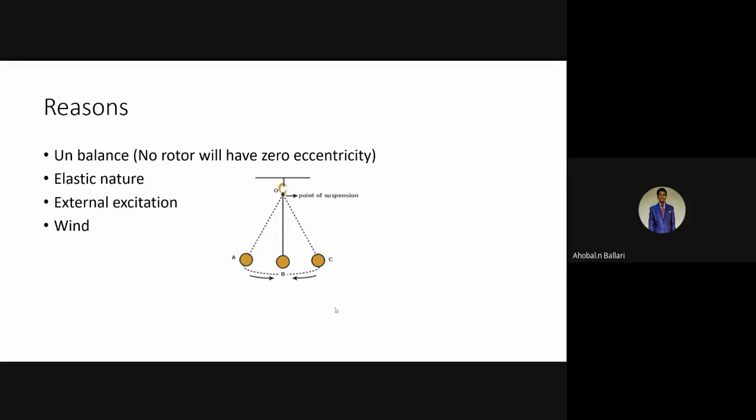Here the answer is: when the mass is distributed only at the end, it is called a simple pendulum. When the mass is distributed throughout the system, then it is a compound pendulum. If a beam is attached instead of the ball, it can be called a compound pendulum because the mass is distributed. Here, when compared to the ball, the thread mass is neglected, so the mass is concentrated only at the end - that is a simple pendulum, as opposed to a compound pendulum.

Compound pendulum will have - a system will have - how many natural frequencies? Infinite number of natural frequencies, being a continuous system. So for any rotating system or any system, before we start vibration analysis, we have to check the natural frequencies. The natural frequency, in the sense, is simply the frequency of free vibration that we have to identify. And one important thing we have to consider is how many natural frequencies we are going to consider for our analysis - whether we are going to consider only one, or two, or third, fourth, or fifth.

That mainly depends on what criteria. So what is the criteria that decides how many natural frequencies we are going to take for our analysis? Can anyone say? Based on what can we select the natural frequencies that we have to consider for our analysis? Can anyone say? Because even when we might have done some experimentation, even in a dynamics laboratory, we may teach our students this particular experiment.

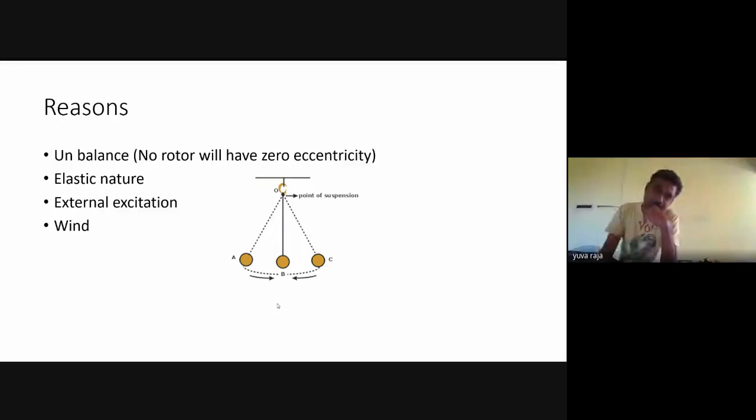Even the simple pendulum figure is in front of you. When we teach this particular simple pendulum experiment to students, they may be calculating the time period or natural frequency of the system. So there is a relation, and this relation can be verified with experimentation. One student may give an initial disturbance, and other students may give a different initial disturbance - it may differ from one to one, but the natural frequency will be the same.

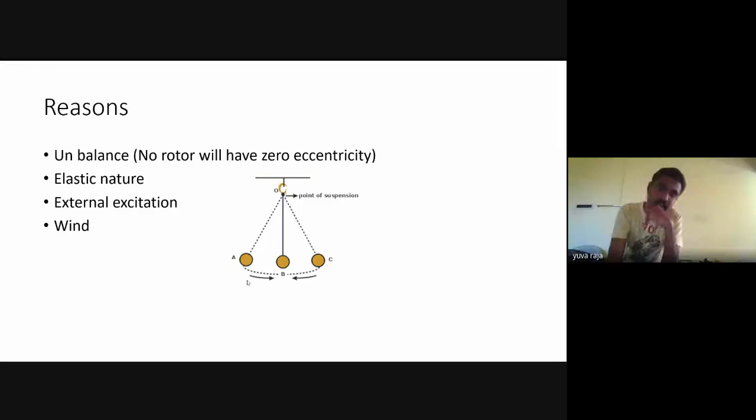So we have to ask how the natural frequency remains the same though you are giving a different initial disturbance. One may give a very long initial disturbance, one may give a very short initial disturbance - so the velocity will compensate. Similarly, for all cases we have to analyze. Here, in most cases, vibration produces bad effects. In some cases, vibration is required - it produces a good effect.

So vibration may produce unwanted stress, rapid wear and tear in bearings and gears. So we are going to talk today a little bit about rotating machinery. So bearings and gears and loosening of parts, etc. These are all some bad effects produced by vibration.

As we all know, some good effects are in testing equipment where we are using vibration. Vibration also produces good effects in conveyors, feeders, hoppers, sieves, etc., and musical instruments. So here, not only a rotating device. First of all, we are experiencing vibration in many places. Even when we travel, we are experiencing some unwanted vibration. That unwanted vibration transferred to the passenger is removed by means of various methods.

Even a rotating machinery, any other machinery, vibration produces some unwanted effect. So as an engineer, as a faculty, as a student, one should know where we have to go for what kind of controlling mechanism. Simply we may not be able to apply a damper to all cases. Simply we may not be able to apply a vibration absorber to all places. An isolator. Some passive methods, some active methods.

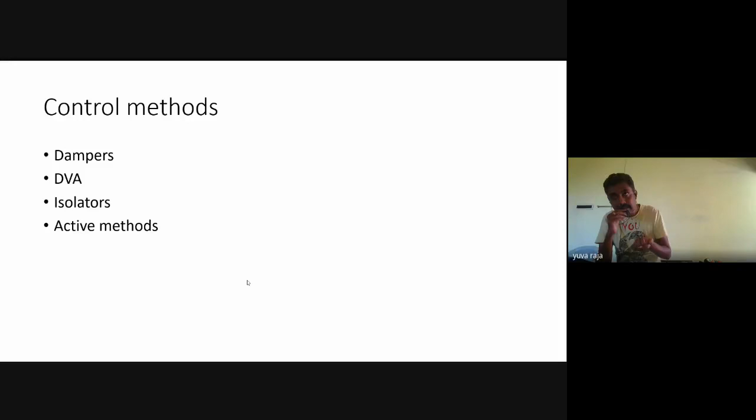So if such a case occurs, then what? The system may vibrate vigorously. The system may fail, may encounter some unwanted stresses, or even some catastrophic failure.

So any system we take, once we find out its natural frequency, immediately we look at the operating frequency range. Though the amplitude of vibration is higher in case of resonance, regular operation is a kind of fatigue load. Vibration is always fatigue in nature, because a system is continuously operating at nearly 1000 rpm or 2000 rpm. For every cycle, there will be a vibration. Even if the unbalance is very small, at 20,000 revolutions per minute

the effect, because of that small mass, small unbalance, is very high. So we are trying to reduce and minimize the amplitude of vibration as much as possible. Reducing the amplitude of vibration will definitely improve the lifespan of the system.

So here, though we are finding out some natural frequency and the operating range, we have to see where we have to go for what kind of a control mechanism. Simply, we may not be able to go for any method. We have some passive methods, we have some active methods.

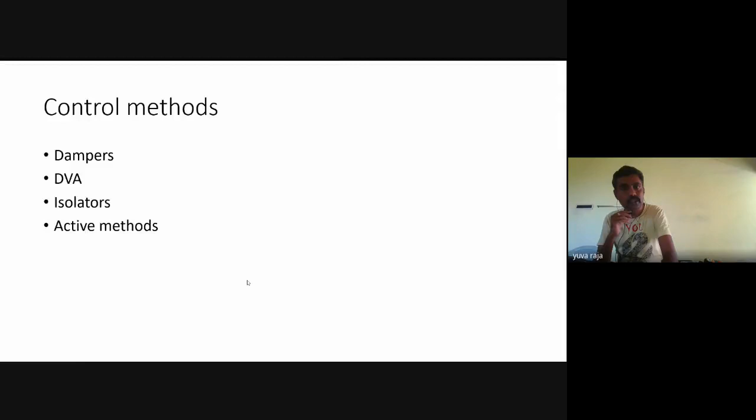Then we have to see what kind of method we can deploy in order to counteract the amplitude of vibration in that particular application, whether it is a machine tool, a bridge, or any application. Here I am going to touch upon the one. We have a damper. A damper is one extensively used method to control the vibration in any system, whether it is a rotating or reciprocating system.

A vibration should be counteracted by a damper, because a damper is a device which dissipates the energy by means of friction or by some other mode to reduce the energy. Because suppose you want to bring down the vibration, means what? You have to drain the energy from the system. The energy from the system should be drained.

Say for example, when we are going to office in the morning, we are brisk. In the evening, we are not that much brisk, because our energy is drained. Similarly, the system energy should be drained, should be dissipated to bring down your system to rest or equilibrium or calm. Here there are different damping, you all know: critical, over damped and under damped.

Here I am raising one question. Most of the mechanical systems are employing under damping. Under damping is used in almost 100% of systems, except one or two places where it is really required, a critical damped system may be used in practical application. Unless otherwise, the most used damping for your case is under damping. Why? Anyone can unmute and answer why under damping is mostly used.

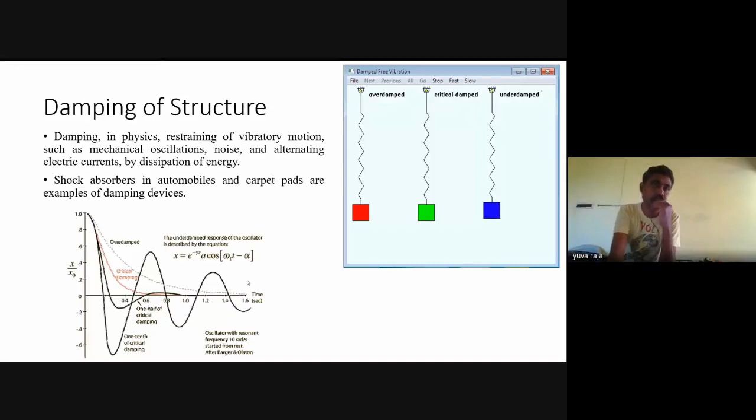So whether you decide to go for a damper to control a vibration after analyzing its natural frequency, or after analyzing the response of a system, you are trying to minimize the response of the system to the maximum extent possible. Then the moment you decide a damper is a suitable mechanism, you decide which damping method. So mostly it is under damping. Some cases where it is purposefully required is a critically damped system. In very minimum cases we have to justify why we are going for such a type of damping. That we have to clearly justify the response.

Here mostly the analysis is a forced vibration, because we are driving a car, with so many rotating parts inside the vehicle. A gearbox is there, engine is there, and many rotating parts are there. The system will experience vibration because of its rotating parts, and the neighboring components also will experience vibration because of its rotating parts.

So forced vibration is mostly a machine tool. A spindle is operating at high speed in a machine tool, at up to 25,000 or 30,000 RPM. So that leads to vibration in the nearby components; a machine bed or nearby components may experience vibration. Even an operator, or even a nearby machine, will experience vibration. It is forced in nature. When you are standing on the bridge, or a vehicle is going on the bridge or under the bridge, you can experience vibration.

When you are standing nearby a bridge, nearby a building that is near the bridge, and a train passes over it, you can experience vibration. It is mostly a forced vibration.

There are two components in case of forced vibration when you analyze it. One is transient, and the other is steady-state. The transient is what will vanish with respect to time. The other part will exist as long as the continuous excitation is present in the system. So forced vibration is simply a vibration where, with application of a continuous excitation, the system will undergo vibration.

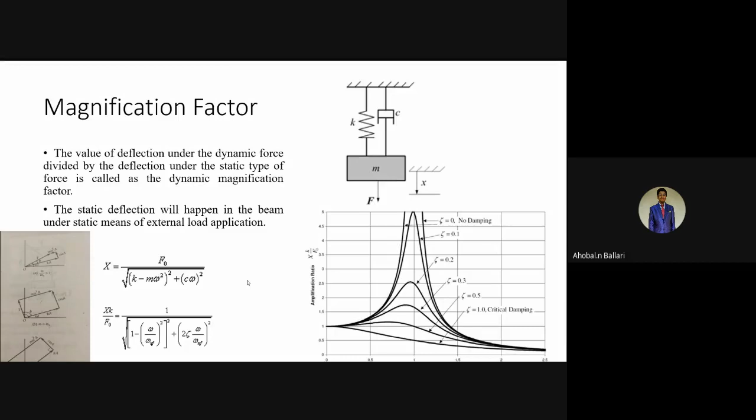Because of forced vibration, this graph is very much essential. Magnification factor, as you can see, is x by (f naught by k), or x by xst, that is the amplitude of forced vibration to that of static deflection. So when we consider the amplitude of forced vibration compared to that of static deflection, we can compare the two, where the forced vibration amplitude will be more than that of static deflection. The answer is it is magnified.

Suppose you look at it for all values of damping, it starts at 1. When omega by omega n is 0, it starts at 1, because the ratio of static deflection and amplitude is the same. But the moment you start applying force, that means RPM, when you start rotating the system and operating at a frequency, then it will magnify. That's why the graph attains some peak, some higher values. So the moment it starts, it magnifies, and that's why it is called a magnification factor.

The amplitude ratio will be higher when you keep on applying force. That's why it is called a magnification ratio. It will be magnified as you keep applying force, or as the RPM increases, it will also be magnifying. When there is an unbalance or bend, it depends on the system. A rotating system will experience different kinds of defects, and each one will contribute.

So here, if you look at this vector graph, I'll take 1 or 2 minutes on this. In forced vibration, we have 4 forces.

When you look at the first graph, Ka is the amplitude, it is the spring force. For the maximum value, x is equal to x sin omega t. We are assuming a harmonic force, differentiating with respect to time to get velocity and acceleration. Here Ka, for the maximum value, is given as Ka. It is a spring force.

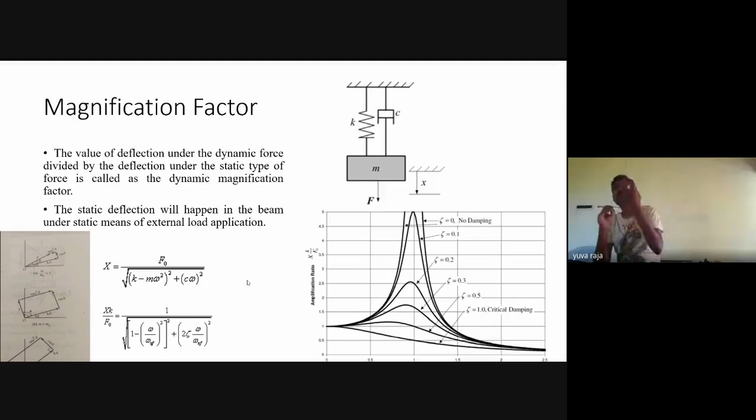We have to choose the mechanism of control also based on some kind of analysis, like we have to analyze the aspects. We have to analyze the frequency response. With respect to frequency response, we have to analyze whether we are operating our system in a stiffness dominant domain, or we are operating in a mass dominant domain, or really a damper is significant for our application. Then only we have to go for a damper.

Forced vibration is what we are concerned with, whether any kind of system is reciprocating or rotating, because a system is mostly experiencing forced vibration. The analysis is because of forced vibration only, the response exists. As long as the force is there, the response is there. So we are trying to reduce a forced vibration.

It is going to diminish. The vibration is going to come down. The vibration is going to settle down. So the settling time may be different. The response is also that much affected.

It is not going to affect unless the force is applied, unless the external excitation is applied on the system, unless it experiences resonance or is operated near to that. The system will not undergo any difficulty. So that is where we have to go for it.

It depends mainly on omega n equals root of k by m, whether we are targeting a stiffness or whether we are targeting a mass. Even if both are not possible, if the system anyway somehow experiences resonance, operating near to that speed, it is an unavoidable situation, then go for a damper, then select a suitable damping factor value. It depends on your case, and try to dissipate energy. Then you bring down your system to minimum vibration.

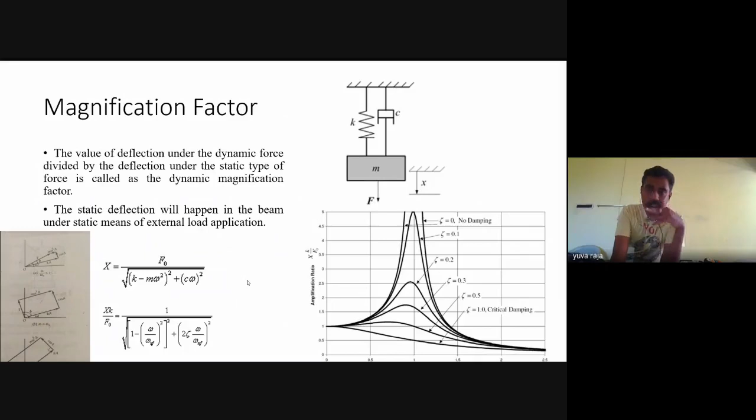Here, the force is applied from outside. The other one is the force is inbuilt, in the sense maybe an unbalance, it is like inbuilt because the force setup is because of unbalance present in the system. Now I am asking you one difference between the magnification factor graph, and the graph of frequency ratio with the amplitude ratio because of this unbalance. What is the difference between these two graphs?

Here it is because of what? Centrifugal force, because of some mass and eccentricity will contribute to vibration. So when the system is rotating, when there is an unbalance, that will lead to unnecessary vibration. That will cause an eccentricity in the system, leading to unnecessary vibration. That unnecessary vibration will harm the bearing or any other nearby neighboring system.

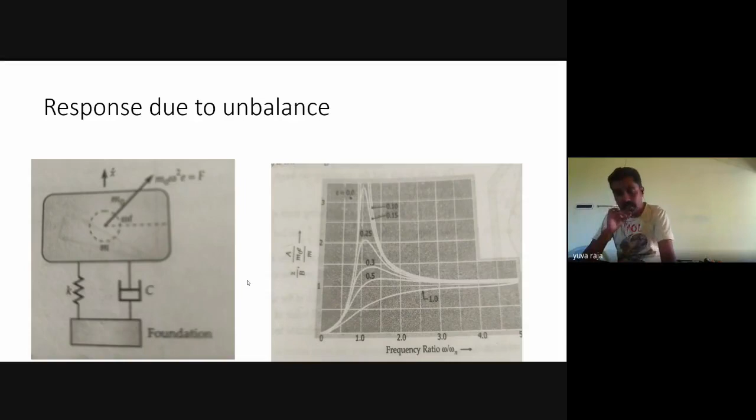Then we discussed the critical speed. It is a rotating system here, which we are teaching, and we discussed many points related to this experiment in the previous slides. One point I want to tell you: any system will have n number of natural frequencies, and n number of critical speeds. The critical speed is the speed at which, why is it called critical? Because we are not supposed to operate at that particular speed, because if you operate at that speed, the system will experience a failure. So in the experiment, suppose the motor RPM is 1440 or something around, say for example you can take 3000 RPM. You have a shaft, and you can calculate the natural frequency.

Here, what criteria do we have to analyze again? If you take a shaft, can anyone answer? You might have taught this critical speed of shaft to students. Can anyone tell what criteria, what boundary conditions we have to consider while talking about the critical speed of a shaft? Can anyone unmute and tell? Because a system will have a number of...

We have to consider the bearings as a rigid support and the shaft as a soft material. Then we can apply the boundary conditions there.

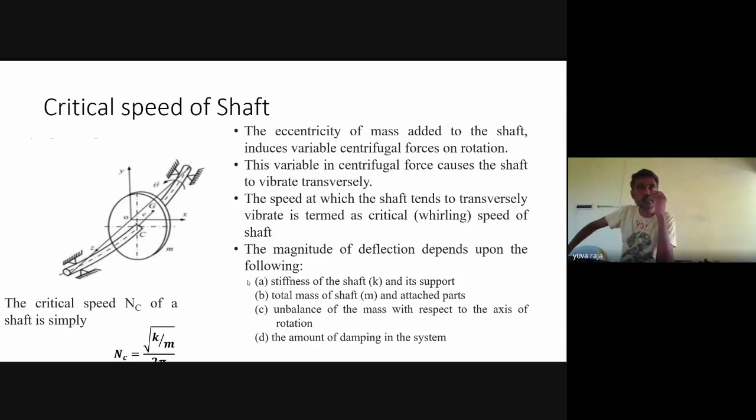The critical speed—sometimes we ask students and they may not be able to tell what critical speed is. Critical speed is nothing but simply the natural frequency. That is what we are finding out—we find the natural frequency and we compare it with the operating speed. Clear? Here the condition may be a shaft.

Here's one question: suppose your system is completely, perfectly, theoretically balanced—shall we operate at the critical speed? Yes, definitely you can operate your system at a critical speed, but the possibility of that is almost zero. That's why we are not trying to attempt the same.

Apart from that, your shaft may have a small bend or anything, so that even before that critical speed, your system may experience some unwanted amplitude of vibration, or may fail because of the bent shaft. So here the case is only about critical speed.

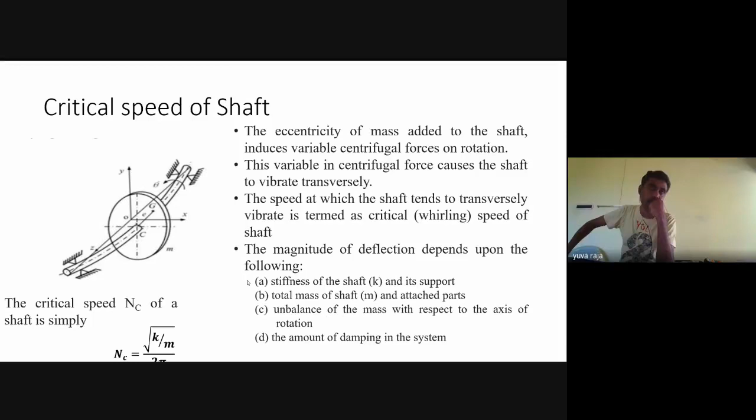When we are talking about a pump and motor system, alignment also comes into the picture. Alignment, or misalignment, is a very important point that we have to consider in fault diagnosis or condition monitoring—misalignment. Clear? Here, as we discussed,

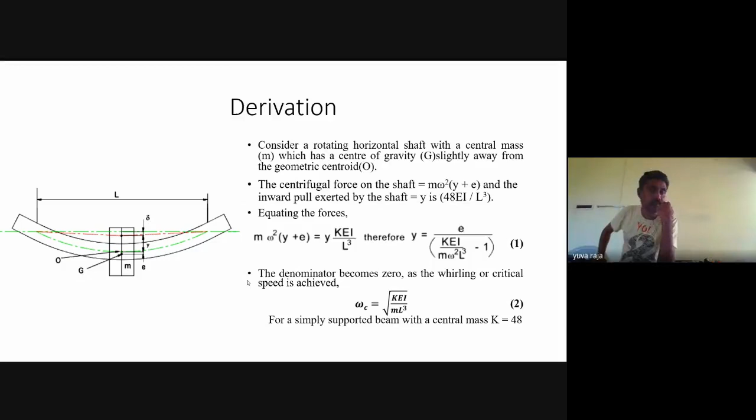based on this, your shaft weight and your center of gravity—where it is going to act. Your CG is acting either outside the axis or inside the axis. It depends on whether you are operating in a certain response range.

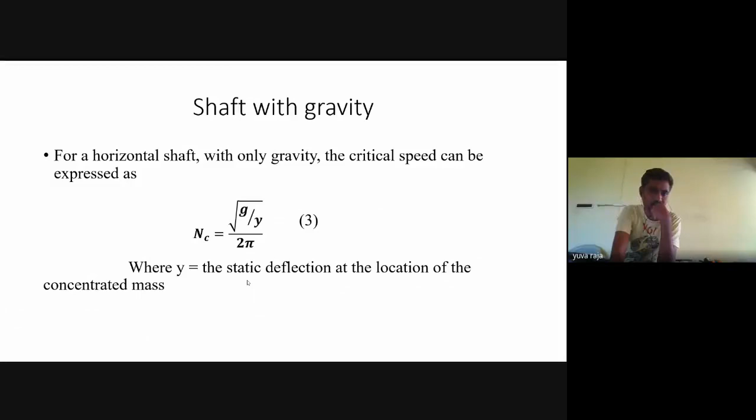If you look at this particular shaft with gravity only, with negligible mass, the relation will be this one. If omega by omega n is less, the deflection y and e have the same sign—that is, the center of gravity lies outside the geometric centroid of the shaft. When the operating speed is higher, it acts inside. When it is even higher, that will tend to coincide with the static deflection. That is why for higher speeds, you will experience lesser vibration.

The vibration—even very smooth running operation—you may experience less vibration for higher speeds.

When omega by omega n is equal to 1, what happens? If you look at this relation, the response of the system will be infinite when you substitute omega equal to omega n, both are the same. The deflection y will be infinite. Because of that, the system will experience unwanted huge vibration, an unwanted huge response. So critical speed analysis is also one important factor for any vibration.

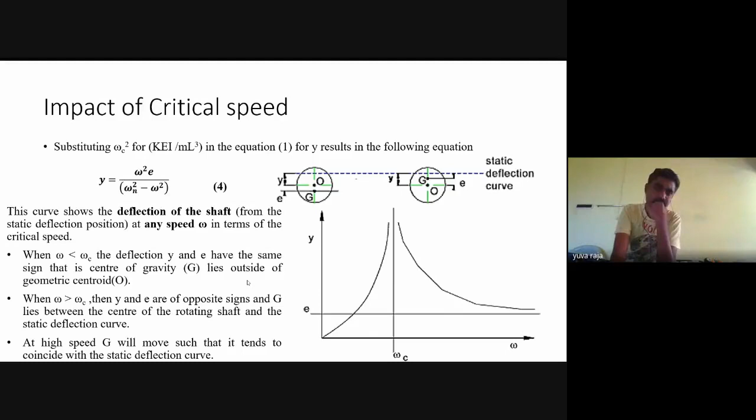So as we discussed, different boundary conditions: a cantilever with a rotating mass at the end, a central rotating mass with a long bearing. How do you define a long bearing and a short bearing? What is the difference? Can anyone unmute and tell? So based on the L by D ratio. Yes, when the L by D ratio is greater than 1, it is a long bearing, and when it is less than 1, it is a short bearing. Very good.

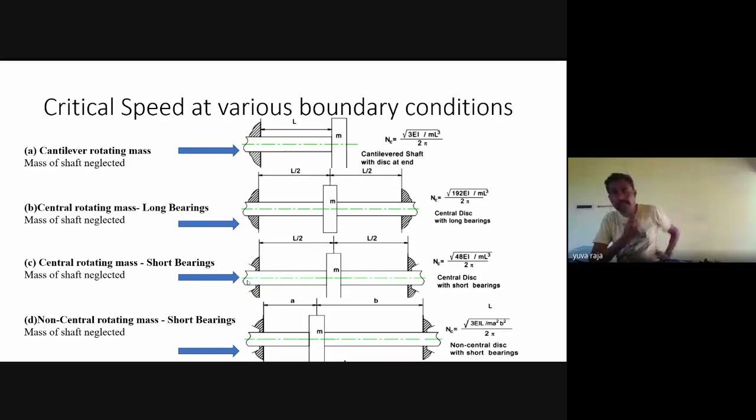Then some different end conditions. We have the response, we have the critical speed. How to find out the critical speed is given. Again, it is a function of this. So even when we are talking about active vibration methods, suppose you want to alter the natural frequency, definitely we have to look at the Young's modulus, the cross section, stiffness and mass. So those are the parameters of the equation.

Then these are all the different conditions with different end supports and different loading conditions. When it becomes multiple degrees of freedom, the relation is here. The Dunkerley method or Rayleigh method is specifically used for transverse vibration. Both are approximation methods. One will give a slightly lower natural frequency, and one will give a higher natural frequency for combined loading. So various boundary conditions are given.

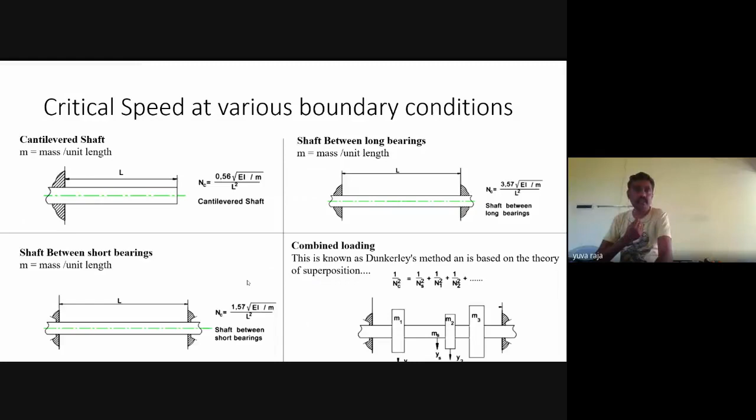And we talked about damper and critical speed, and now transmissibility and vibration isolation. My question is where we have to go for vibration isolation. The damper is suitable when omega by omega n is around 0.8 to 1.2, operating in that particular region. It will be more effective. Another method is a dynamic vibration absorber, for constant speed machine application, because we add a secondary system to the primary system and try to absorb the energy of the primary system through the secondary system. The secondary system will vibrate and the primary system vibration will come to zero. Theoretically speaking, but practically it will not come to zero.

And we cannot claim that all machines are constant speed, because even a slight voltage fluctuation may cause a slight deviation in the speed, which changes the performance of the dynamic vibration absorber or secondary system. That leads to what? Maybe an increase in amplitude of vibration. Theoretically, it is mostly suited for constant speed machines. When omega is equal to omega n and you design a secondary system whose natural frequency matches your operating frequency, your primary system will come to rest.

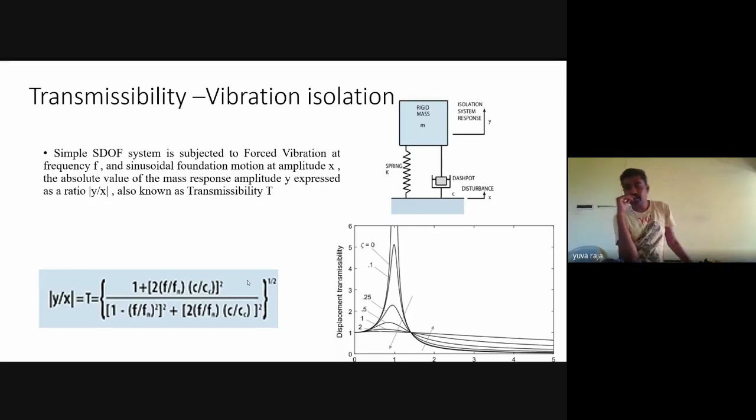So here, the automatic monitoring concept. Now, maybe we have the facility for all. We have a DST sponsored noise and vibration laboratory in PSG College of Technology. We have reasonably good facilities for vibration analysis. For any system, we have single axis and multiple axis transducers available with us, and we have PXI modules, a data collector, a modal shaker. We have all the systems with us.

Then we have FFT. When you take the time domain graph into the frequency domain by using a fast Fourier transform, we'll be able to convert it to the frequency domain. A simple example: a simple rotation is converted into a time waveform graph. Here one complete cycle is 360 degrees, one revolution. A simple conversion of

simple harmonic motion representation. Here, if you take a pump vibration, there is an impeller rotating inside the pump. The impeller may have 4, 5 or 6 vanes. Depending on the number of vanes, tiny packets of water are forced into the pipe. That effect is called the water hammering effect or hydraulic pulsation. That is one important factor while analyzing pump vibration.

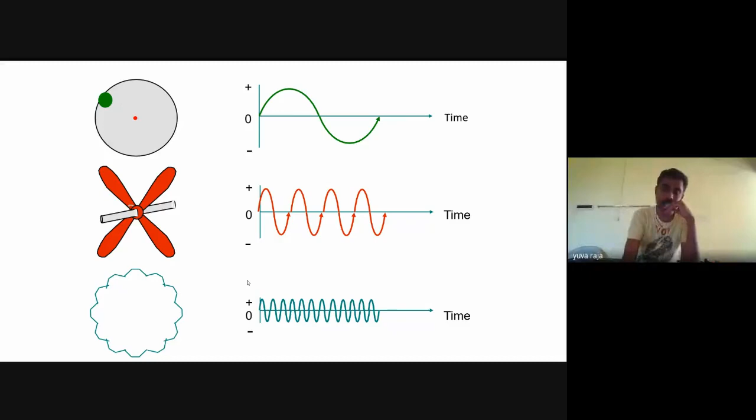So a graph is given here in front of you for each case. Then a complex graph is given here, in the time domain. So it is superimposing one on the other. One complete revolution, whereas the impeller system will experience 4 cycles per revolution. The other one is 12 cycles per revolution. So it is mixed together.

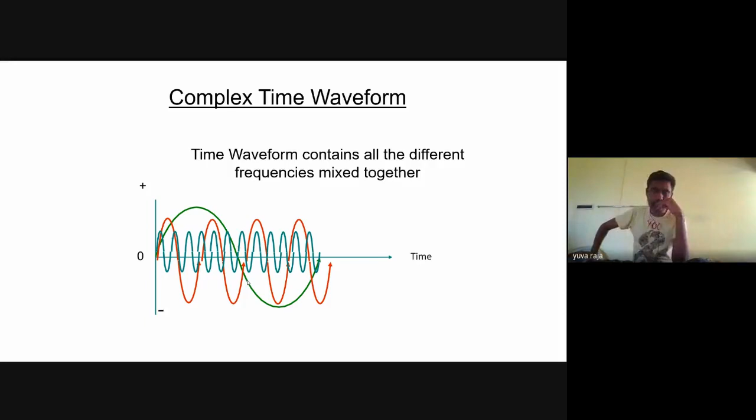But with the time domain analysis, we may not be able to infer any fruitful results. Because of that, we definitely have to go for a frequency domain analysis. So for that, we have to convert the time domain analysis into frequency domain analysis by using an FFT analyzer. Fast Fourier transformation we may use to convert this into that one.

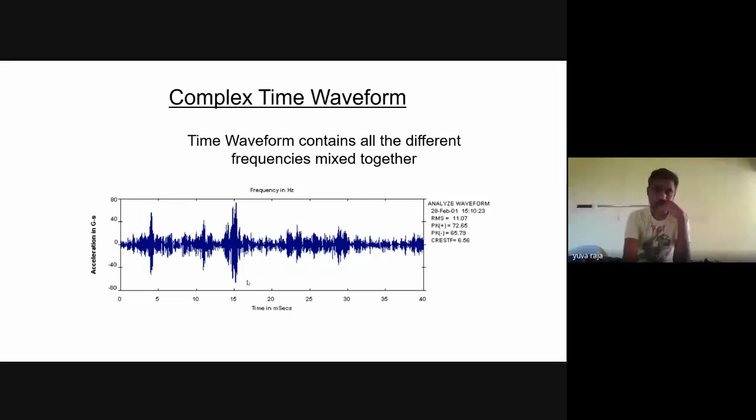Here it is given with respect to acceleration, or you can give it with respect to displacement, or with respect to velocity, whatever it is. The measurement may be with respect to any quantity. With respect to any quantity. Now in a frequency...

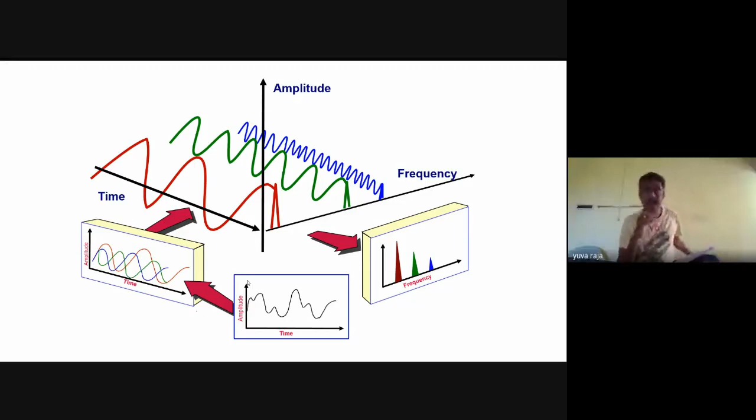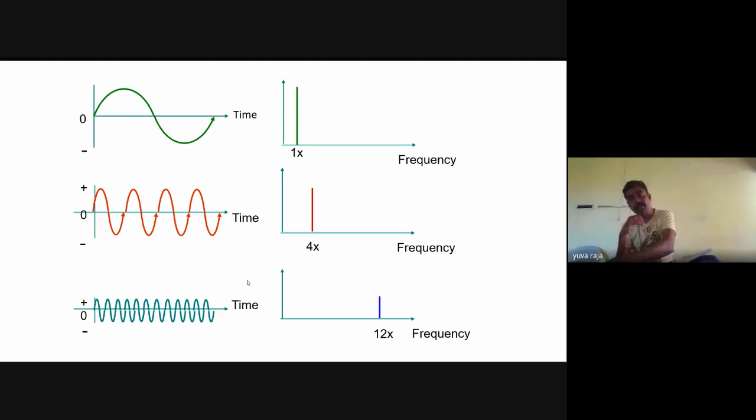So how to attempt when you are talking about a system, how to start and how to attempt to solve the problem. So here at a different x, the first one is at one time of its operating speed, the second one is at 4 times of its operating speed, and the third one is at 12 times of its operating speed.

Simply if you have a peak, we may not be able to say it is only because of the coincidence of frequency to operating speed. For that, we have to analyze the phase angle also. When the phase angle is 90 degrees and it shifts from 0 to 180 degrees, then only it is perfectly a natural frequency. Otherwise, it may not be a natural frequency. It need not be a natural frequency.

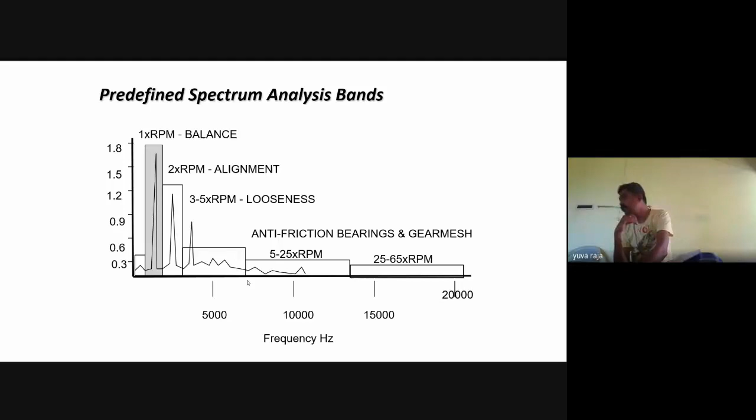And even when you take a signal, maybe some noise, the effect of noise also - the surroundings also will contribute to the amplitude of vibration. All that we have to filter it out.

And as I told, outer race frequencies - one is the ball pass frequency outer race, ball pass frequency inner race, and ball spin frequency, and the cage failure frequency, or it can be called fundamental train frequency. Normally, a ball pass frequency can be defined as the rate at which a defect in the inner or outer race comes into contact with the roller. It may be with respect to inner or outer race.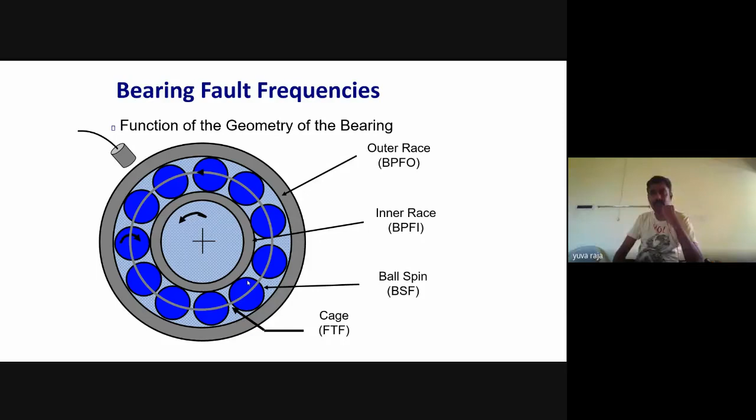The fundamental train frequency corresponds physically to the number of times the bearing cage makes contact each time the shaft makes a complete run. For one complete run, the bearing cage each time makes physical contact - that is called FTF, fundamental train frequency or cage failing frequency. So here is an example, some defect is given.

So Sir, no audio, sir. Hello, sir, your voice is not audible.

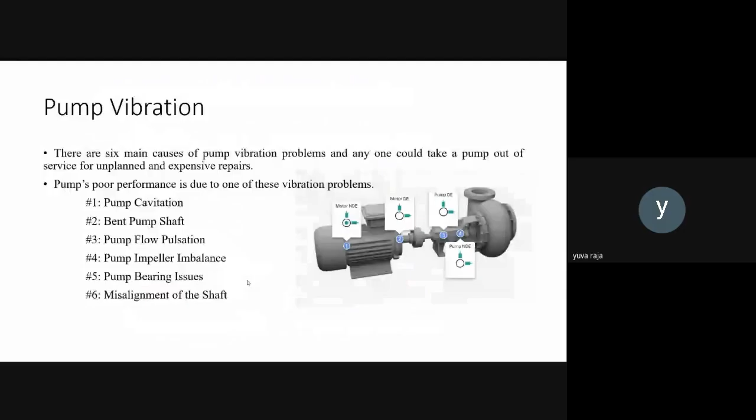More than that, from a single place, from Pune, they'll be able to control and see the status of the system. They can monitor the status of the system with the remote sensing method. Nowadays people are working on IoT enabled systems also.

So if you take a pump vibration, specifically the pump vibration belongs to cavitation. The explanation you also know, because of shortage of time I'm just telling only the problems - cavitation, bent shaft, pump flow pulsation, hydraulic pulsation. That is called with respect to the number of impellers and its operating speed. We'll be able to find that out.

And impeller unbalance, unbalance in pump shaft, unbalance in impeller. Then bearing issues, as we discussed, bearing issues again will contribute the 4 or 5. And misalignment - there is an experiment also we conduct for our students, misalignment with the misalignment kit. With that particular permitted misalignment, how the system can run at a certain speed and for a certain lifetime, we'll be able to predict.

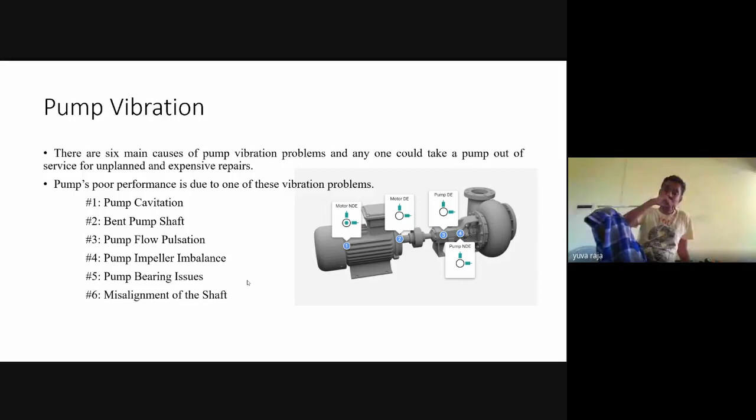But we are trying to avoid the misalignment. If you have a misalignment between the motor shaft and pump shaft, that leads to a lot of complications. Different frequencies contribute to the rotating system at different peaks due to various reasons, so we have to analyze the reason. If you take one frequency domain, one particular peak at a characteristic RPM, it may be due to a specific cause. Once we know that, we try to counteract that particular problem with any method of controlling—we try to avoid it and react to it.

So this is about the basics, starting from natural frequency and how to proceed. It depends on what and where to go for what kind of controlling mechanism in case of vibration analysis. And if you take a time domain and convert it into a frequency domain, that gives the characteristic frequency. I've touched upon the basics and one or two case studies.

The detailed analysis can even be done, and we did it in many places. We even used to do consultancy for nearby companies in Coimbatore, and even during this pandemic we visited LMW once for some vibration in a floor at a textile machinery unit. There was vibration in the floor near one particular machine—huge vibration you could experience. We tried to find out the operational modal analysis, measured the vibrations, gave some suggestions, and also did some noise-related consulting using the facilities available at PSG College of Technology.